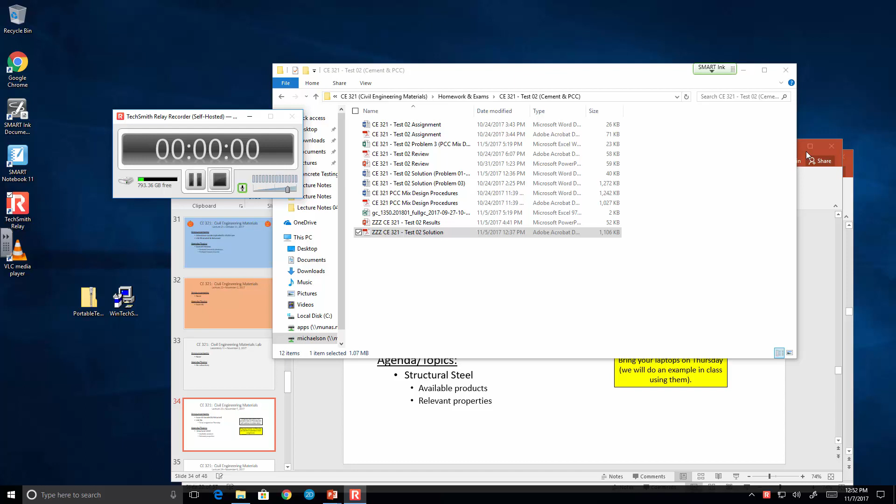Okay. So exam 2, you all have got it. You've got it graded. Like I said, I haven't turned the grades on yet. I will sometime today, near the end of the class or so on and so forth.

I am going to give you all a homework on steel. Okay. If I had to guess, you can probably expect 2 more homework assignments throughout the semester in here. Maybe 3. I'm not sure yet. But I'm definitely going to give you one on steel and alloys, because at the very least you need to process the data that we're going to collect on Thursday. And then I think you should do a couple steel related problems. I think it's really important.

And I'm probably going to give you a homework 7. I'm not sure if I'm going to give you one homework on just wood and asphalt. I might split it up into 2, but I'm going to give you a couple problems on that, and that'll be our homework assignments throughout the semester. That'll be it.

For Thursday, like I said, Thursday might be a little bit of a long day in lab, because we're going to be doing beam breaks, we're going to be doing cylinder breaks, and we're going to be doing alloy testing. So there's no way around that. That might take a little while. We'll talk about that more in detail on Thursday.

One thing I will mention, on Thursday, bring your laptops, okay? We're going to do some data processing in class, and I think it'd be easier if we all do it together. So I will post a sample data file on Blackboard. We will all process it together. Sound good?

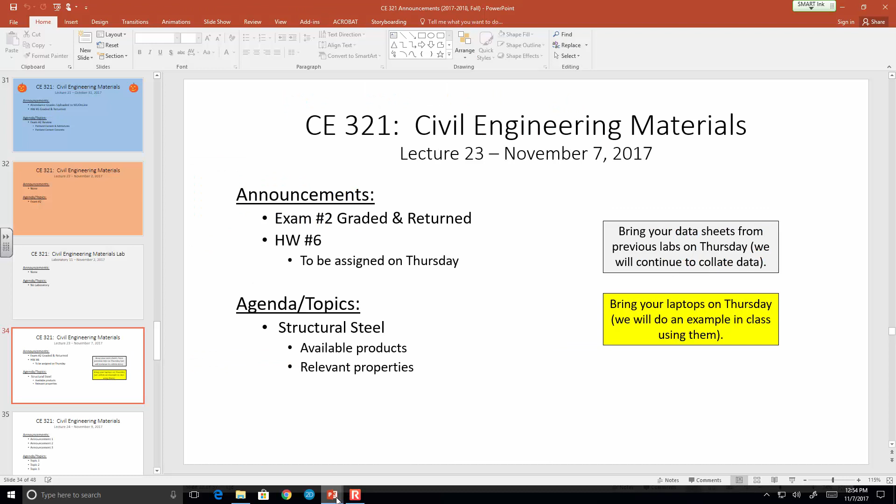Okay, I have that mentioned in the lecture today. It's like example 10, but we'll sort of skip it and leave that for Thursday. I kind of want to do it on Thursday because that's the day we're going to do it in the lab, and I think that makes a little more sense. Okay, we'll see if I have a voice between now and the end of the class.

Okay, all right, so it's been a while since we've talked about steel, so let me sort of recap. One thing I'm not going to cover is the production process. Again, I'm not going to talk about melting raw components or the metallurgy aspect or electric arc furnaces or anything like that. What I want to talk about today are commonly available steel products. There's a few things I want to get out of the way. We've talked about some of this before, but I want to make sure this stuff is clear.

I want to talk about bolts. I want to talk about welding. I want to talk about rebar, because this is stuff that you all need to be aware of as civil engineers. So we talked about hot rolled structural steel products.

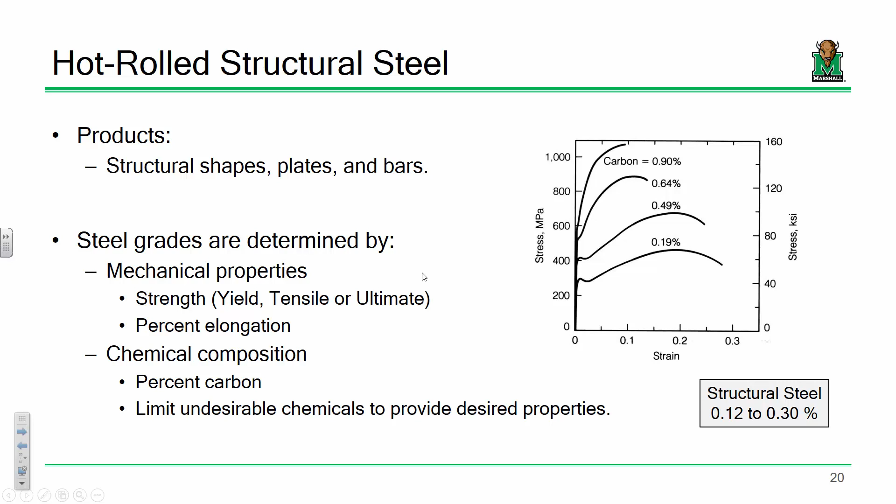One of the things that we said is that for structural steel, generally your carbon content will affect your yield stress, your tensile stress. It will not affect your Young's modulus in the world of structural steel. Regardless of your carbon content, generally your Young's modulus, the slope of the elastic region, is the same. It's not really affected by carbon content, so that's something to be aware of. But your grades of steel are going to be affected by that. We mentioned this last time we talked about steel, different grades of steel like A36, A992, A572 grade 50, and so on and so forth.

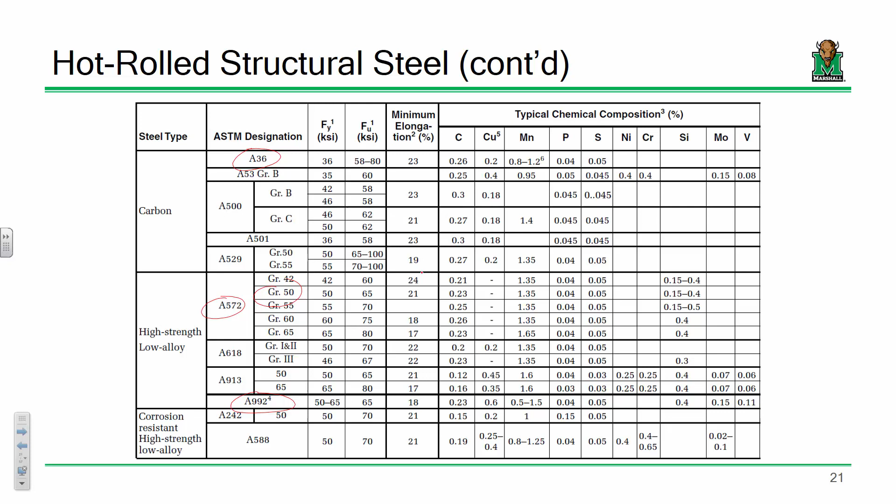I'm going to skip over this relatively quickly just because we've already talked about this, but I just want everybody to be aware that there's oodles and oodles of different steel grades. If you want a rough idea of which ones are the most common, I would say A36, A992, and maybe A572 grade 50. Those are arguably your most common grades of steel. Now, let me also say this. I'm leaving a couple out, like I'm not talking about rebar. Rebar tends to follow its own grade. And some other specialty products like shear studs tend to follow their own grade. Bolts tend to follow their own grade. But general structural steel, those are some pretty common grades that you would use.

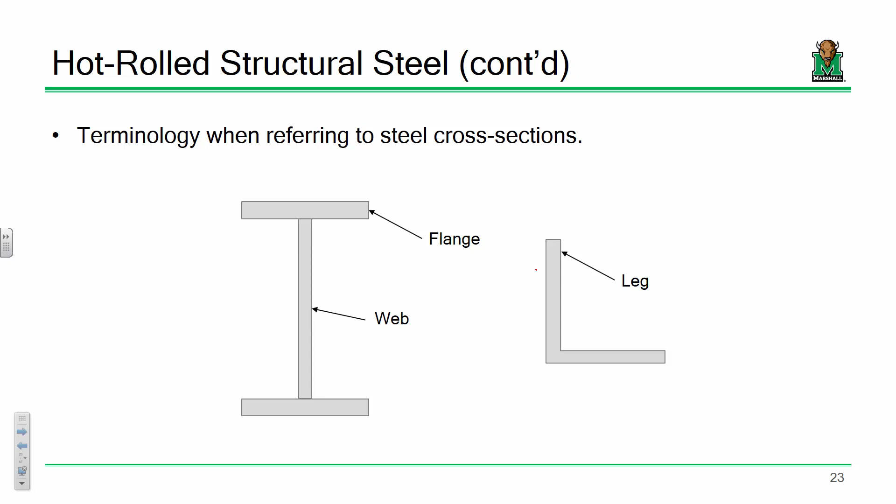We talked about hot rolled shapes like flat bars, W shapes, angles, channels, T's, so on and so forth. Remember your terminology. This is the flange. This is the web. That's the flange too. This is the leg. This is the other leg. So just make sure if you're talking about angles, it's legs of angles; for I-beams, flanges and webs. Just make sure you're aware of that terminology.

Designations. Make sure everybody remembers this. So for a W21 by 93, the W refers to the shape classification. So this is a wide flange shape. It's essentially an I-beam, but we call them wide flanges because the flanges are flatter and a little wider in general. The 21 refers to about how deep it is. The 93 is its longitudinal weight.

A W21 by 93 per foot weighs 93 pounds. So if I have a 10-foot long section, it's 930 pounds. So that's something that you as engineers should just know, okay? So that's just something to keep in mind.

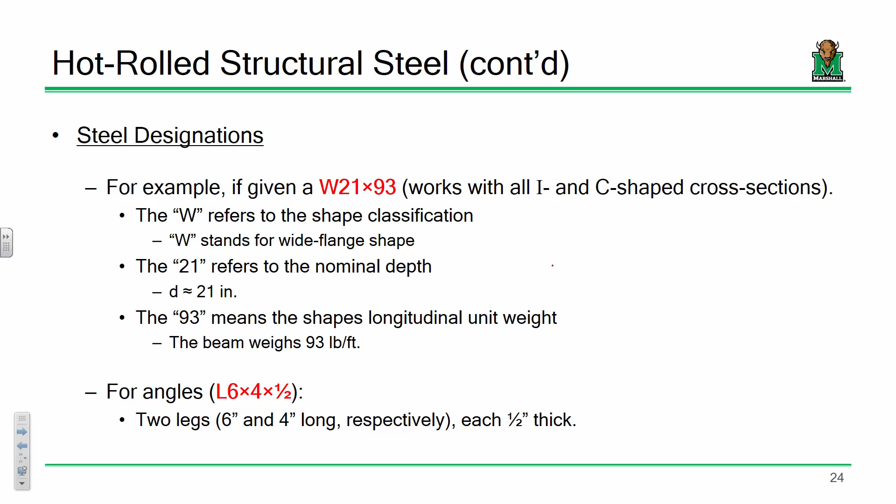Angles. So the designation for angles, if I have an L 6x4 by 1/2, the long leg is 6 inches, the short leg is 4 inches, and each of those legs is 1/2 inch thick. So if I had equal legs, I might say L 6x6 by 1/2, and so on and so forth. Everybody okay with that? Okay.

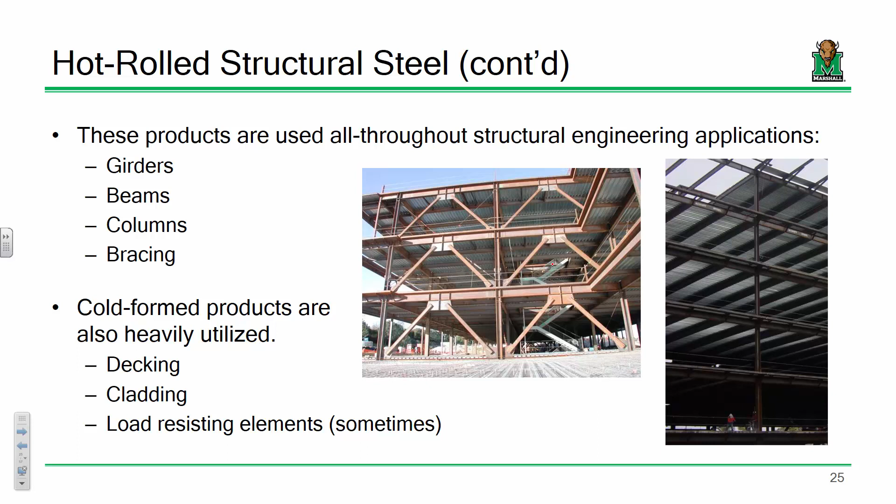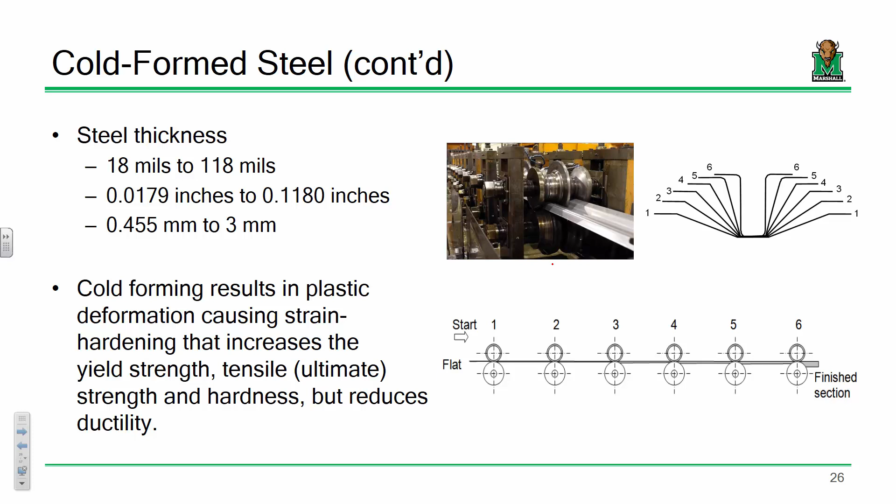So hot rolled products go into beams, columns, braces, girders, you name it. We mentioned cold form products last time that can be used to produce decking or cladding. With cold rolled products, you take a pre-produced flat plate of steel and you successively bend it into a desired cross section. So it starts out flat, and then one roller bends it up a little bit, the next roller a little bit more, and so on. You can get all sorts of different cross-sectional shapes with cold form steel. So that's a pretty commonly available product.

It's very commonly used, for instance, in floor pans and deck pans for buildings. Here's another example. How many of you have been on a West Virginia DOH bridge construction site? Have you seen them use SIP metal deck forms for concrete decks? It's like a metal wavy pan. That's an example of a cold form steel. They also tend to be used for wall studs in buildings, like light metal gauge wall studs. They're really thin, so they can buckle, and because they're thin, if they corrode, it's a lot worse. So you have to take that into account.

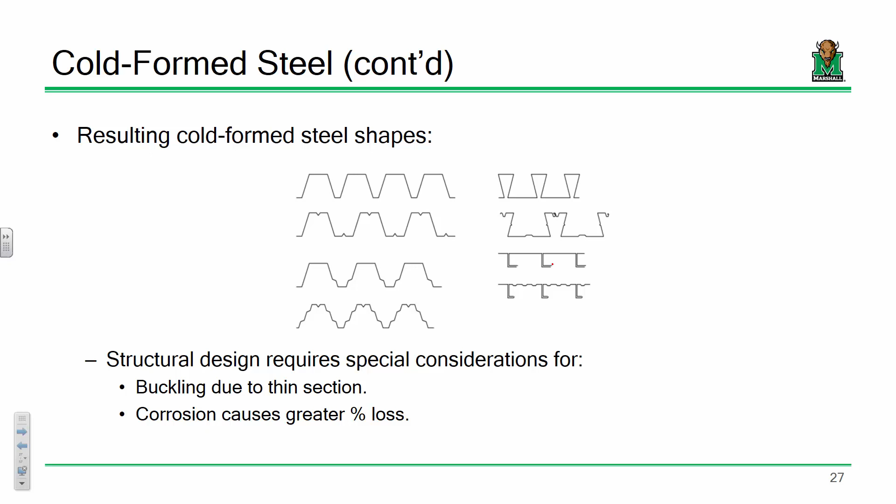Okay, bolts. Did we talk about bolts last time? Okay, I'll go over this very quickly. There are really three main methodologies to join steel together: bolts, welds, and rivets. We don't rivet anymore, okay? You may have to perform load rating on, let's say, a bridge that's been in service for 50, 60 years and has riveted connections, so you may have to do some sort of rating application to understand its capacity. Rivets are highly variable in terms of their behavior, and they're kind of dangerous to put in, so we don't use them anymore, especially since we have high capacity bolts and we can weld with a lot better quality control. We just don't need to rivet.

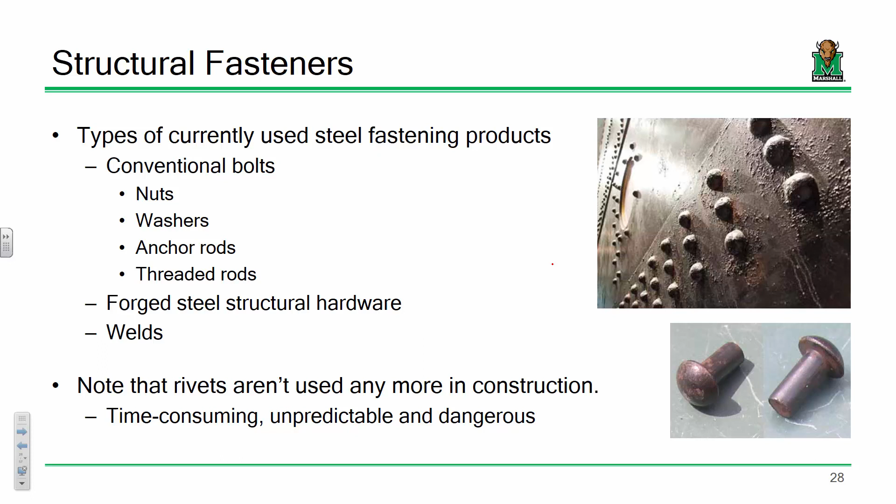So I really don't say much about rivets other than there might be a time in your career where you have to load rate them. And when you do, you basically make an assumption and apply one heck of a factor of safety to it. And that's pretty much what you do. I wish there was a more scientific means. There really isn't. There's been some research to try and quantify it, and it's very variable, so that's really the only way you can handle it.

If you look up ASTM A490, it is a specification for high strength bolts. That's what it is. So those are your grades. A490s are a little bit pricier, but you can use less of them. So it's a question, if you have to design a connection, do I use 10 A325 bolts or do I use 8 A490s? Well, it's a money cost, whichever's cheaper, and whichever's going to be more available. There's never really a good answer to that. Steel is one of those materials where its price does vary a little bit from time to time. It depends. So you just need to be able to assess both.

A307 bolts do exist, but we don't use those very much. Those are used primarily to get an initial connection together. They're used for temporary bolts, for secondary members. They're really not used very much in load carrying capacity. In your careers, you're probably going to see A325s more than anything, just so you're aware.

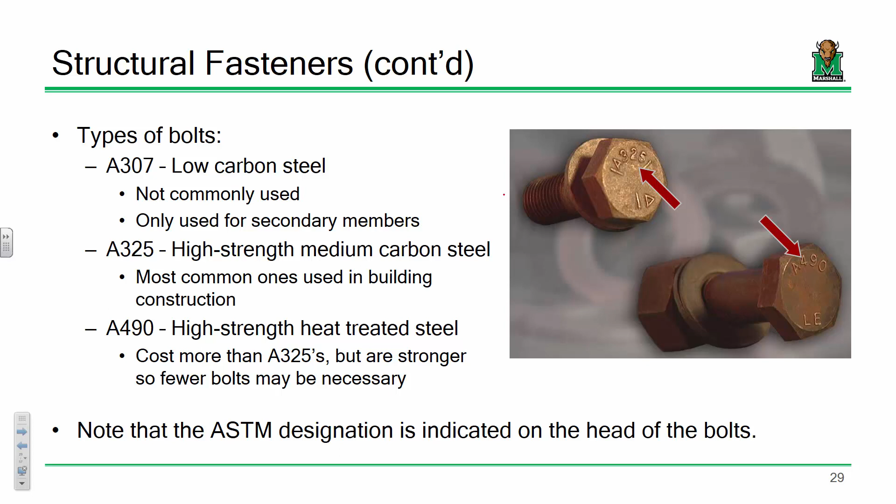Now, I'm not going to get too much into bolted connection design. If you have a chance to take steel design, we'll talk all about that. But I'll give you a few nuggets of wisdom regarding steel connections. So if you're talking about bolted connections, generally when you design the connection, one of two things can happen if you're looking at failure. Either A, the bolt's going to fail, or B, the plate's going to fail. It's pretty much that simple.

So if we're talking about bolts failing, it's pretty straightforward in terms of design. We determine the limiting stress on, let's say, a bolt. So if it's an A325 bolt, we have a limiting shear stress. If it's an A490 bolt, we have a limiting shear stress. So we take that shear stress, multiply it by the area, and account for safety factors, and then we have the capacity of a bolt. So I'll make up a number. Let's say one bolt is going to fail in shear at 10 kips. Let's say my connection is going to have 120 kips on it. How many bolts do I need? If one bolt's 10 kips, the load's 120, how many bolts do I need? 12. It's that simple. Literally lay out 12 bolts.

That's it. Make sure that you lay out your bolted connection according to spacing requirements and edge distance requirements. What do you think is going to happen if I lay out my connection and the bolts are too close together? What's the problem with that? What's that? That's a possibility. I'm thinking more practically. What happens if you got bolts that are too close together? Okay. There you go. You can't get a wrench around it. You have to have the bolts spaced some distance apart so you can actually put the thing together.

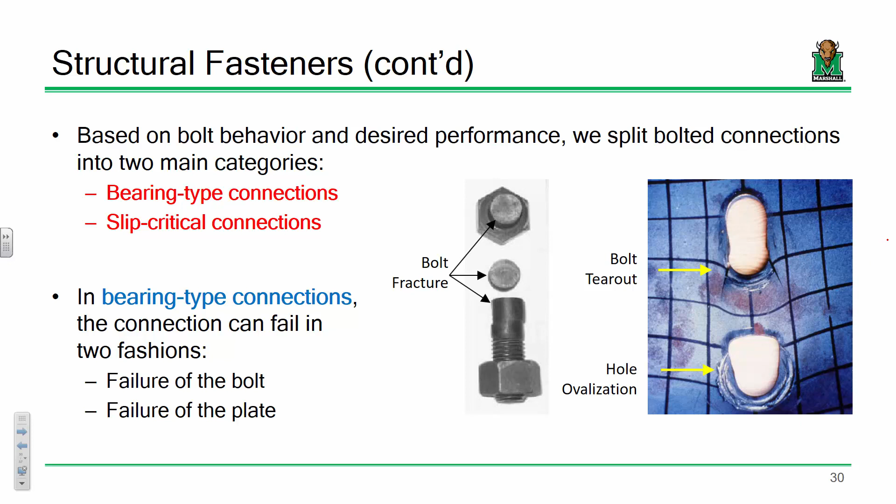And as long as your connection has enough capacity to resist the loads, that's basically it. So that's the long and short of a bearing type connection. Now a slip critical connection is a little different. In a slip critical connection, we have to ensure that neither of those things happen that was in the slide, but we also take into account friction, okay?

So here's a plate, here's a plate. Slap them together, stick a bolt through them. The more you tighten that bolt, what's going to happen to the two plates? They're going to push together, right? I'm going back to physics 211. I got a normal force. I got a coefficient of static friction between plate A and plate B. That means that there is some frictional force developed between the two plates, right? Okay? I can count on that for design purposes.

Now, I can't get as much capacity out of a slip critical bolt as I can a bearing type bolt. So if a bearing type connection only needed 10 bolts, slip critical connections might need like 20 bolts. Okay? But that might be necessary in certain scenarios.

For instance, if I've got a lawnmower and I've got the motor bolted to the frame and it's really loose, I start that lawnmower up and start running it, what's going to happen? Those bolts, this is going to fall off, right? So under any scenario where you're going to have either vibratory loads or high cyclic load, you kind of have to use a slip critical connection. Now, what civil engineering applications do we deal with where we have high cycles of loads? What's that? Bridges, yeah. So generally, connections in highway bridges are slip critical, okay?

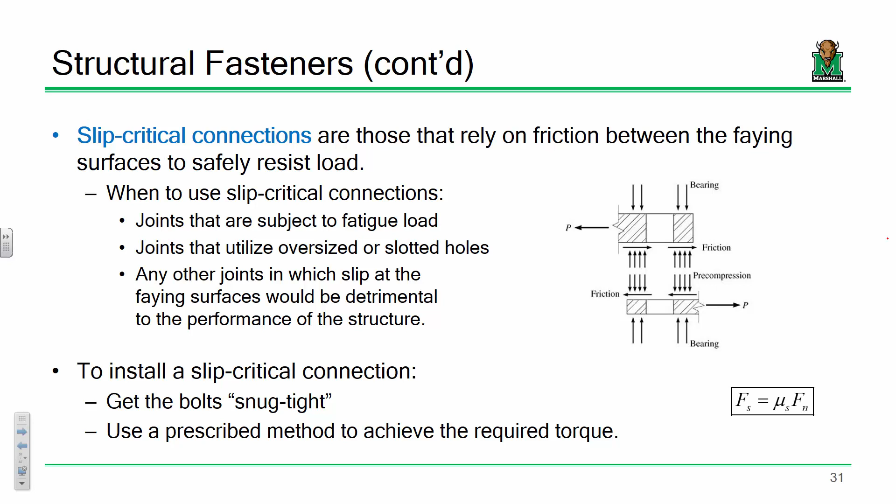Now, to get a slip critical connection, you have to install it a certain way, okay? The first thing you have to do is get the bolt snug tight. Now, what's snug tight? How do you measure that? Well, generally, snug tight is a few hits of an impact wrench or the full effort of an iron worker using an ordinary spud wrench. Literally just getting the plates into contact.

Okay. Once you've gotten it snug tight, you have to use a prescribed method to actually get the prescribed tension in that bolt. We're talking each bolt can be seeing 10, 15,000 pounds in pre-tension. I mean, we're talking about significant tension here. We're not talking about just getting it kind of tight. I mean, these are prescribed tensions in order to generate that required frictional force.

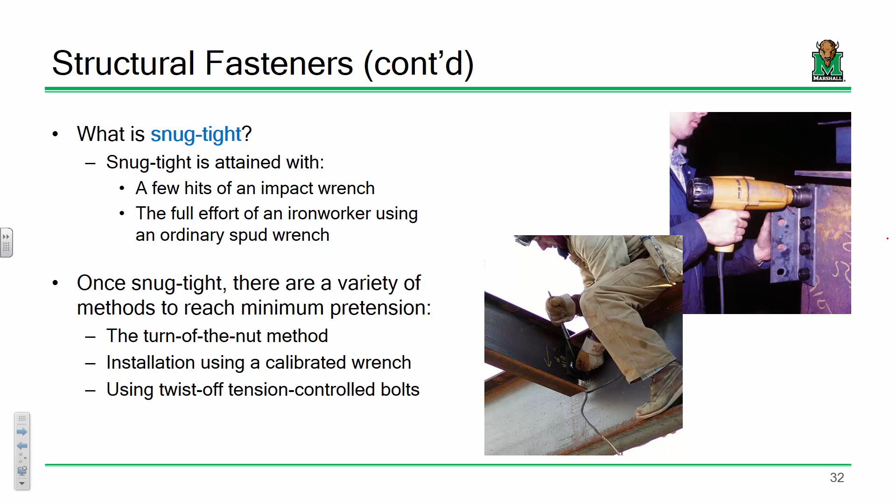So the idea is that depending upon your bolt and depending upon your connection, you'll look it up and you'll see snug tight plus, I don't know, a third of a turn, or snug tight plus a half of a turn. So what you'll do is you'll mark your bolt, mark your plate, and let's say it's a half a turn. So you'll mark this, but then you'll mark your nut half of a turn away. Then you'll apply that tension to where they line up. When it's all said and done, all of your bolts and all of your nuts should line up. And that's an indication that you've got the appropriate amount of pre-tension.

Is it a rough estimate? Yeah, it's a rough estimate. But generally, if you actually measure the required pre-tension in bolts versus what we specify, we usually end up getting a little more. So that tends to be not a big deal. This is one way of achieving a required pre-tension.

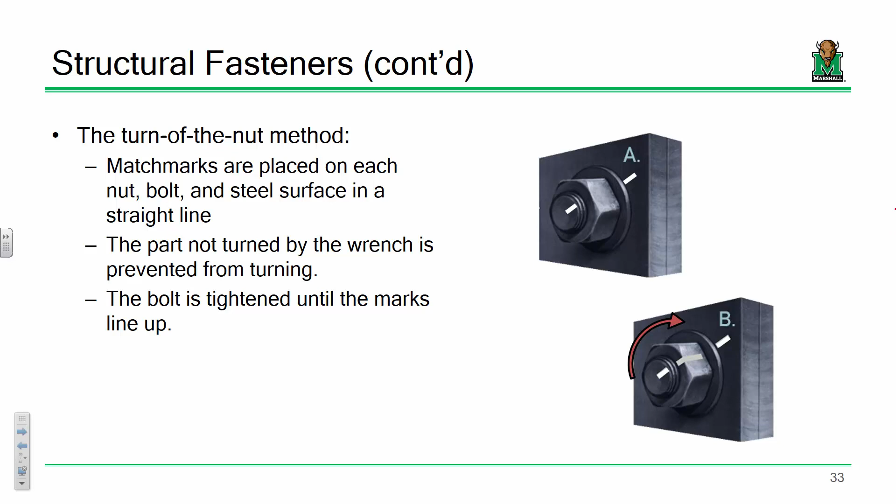Effort. Usually, you'll need a larger bar wrench. There are some high-capacity power tools that you can use and just work in it. Well, let me say this. One method that's become real common nowadays is to use twist-off control bolts. There's a little bit of an initial premium because you have to buy some special hardware, but they're really nifty, okay? And they're really simple to install. These things are pretty cool.

So first off, if you ever see a twist-off control bolt, one of the things you'll notice is that the head is rounded. Okay, which if you've ever put things together, if you've ever done any mechanic work on a car, you're like, well, don't you have to have a hex end on each end so you can put a wrench on one end and a wrench on another end? Like, how do you grip that? Well, you don't. Okay, this is a very specialized wrench, so let me explain how it works.

So you put the bolt through, you've got your washer and your nut, you screw that on. What this specialized wrench does is it actually grips the nut and the bolt at the same time. So if you notice, see how there's this sort of nub on the end of the bolt that's got these little grips on it? Everybody see that? So what the wrench does is it grabs that splined end and it also grabs the nut, and it turns them both at the same time. And then once you reach that required tension, it breaks that end off.

So all you have to do is look at the connection, and if you see a bunch of connections with those ends broken off, you know you've met your required tension. So it's a little easier on an inspection side. A lot of contractors tend to like this because it's quick. You can get it done. So, anybody ever seen this used? You seen it used? It's pretty nifty, isn't it?

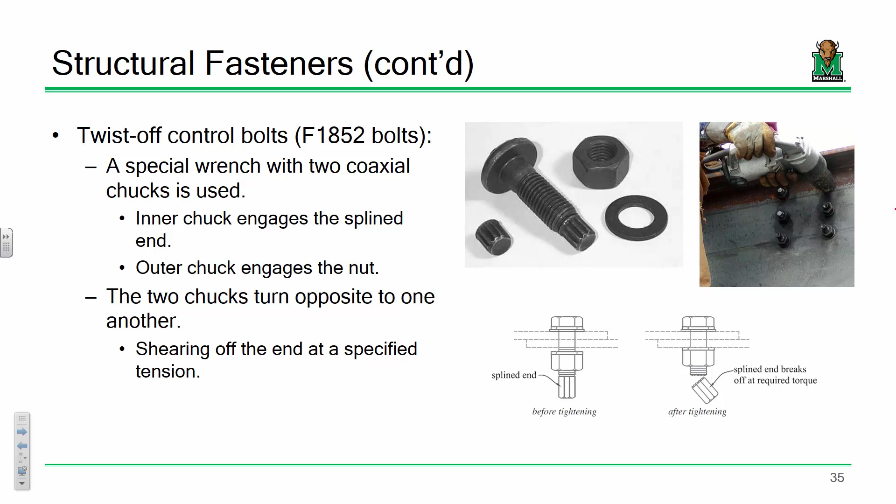What's that? Oh, the one in Charleston? That doesn't surprise me because there's a lot of bolts there, there's a lot of connections there. And I mean, you're talking about serious savings of time. I mean, real time savings. That's the type of stuff that wins bids. You know, if you say, well, I'll use these connections as opposed to standard bolts. Is there a little bit more of a premium? Yeah, but how much labor are you saving over the entire job? That's serious savings. Okay. Any questions?

All right. Now, let me just make sure you all are aware of something. Okay. We could all go out right now, and as long as we had proper safety training and the appropriate tools, everybody in this room could be installing bolted connections right now. Okay? That's bolts. Welds, yeah, that ain't the case. Welding is an art form, and it takes years to acquire that skill.

How many welders do I have in here? I'm just curious. Okay, so we got some folks in here that can weld. Welding is not easy. It's not something that you pick up and within the first 5 minutes you're an expert welder. There's a reason that welders who do welding on nuclear submarines bring the paychecks home that they do, because it's tough. It's not easy, okay? So it's something I want you to recognize. Welding is an art, okay?

Now we can get some serious capacities out of welds as long as they're done appropriately, hence why the required training. I can take piece of metal A and piece of metal B and join them together. That's all I can promise you. I can't promise you an AISC certified weld. My skill is meager at best. So yeah, I can weld, but I'll be the first person to admit I'm not great at it.

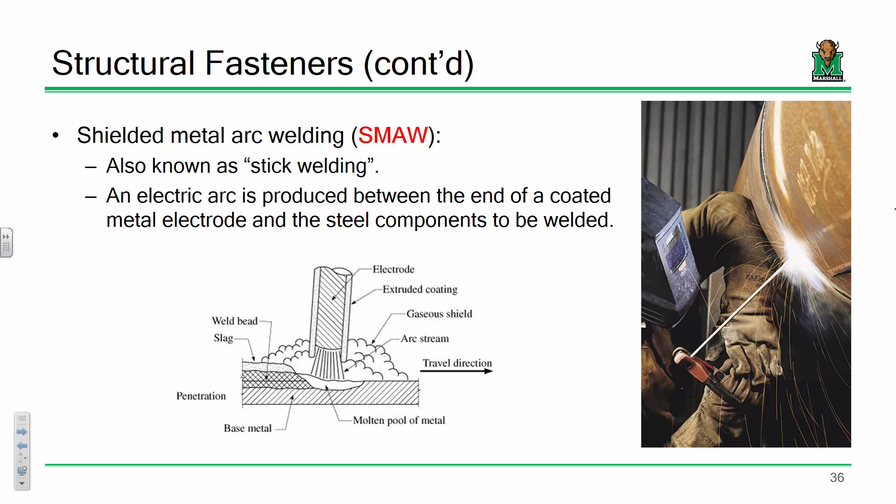So stick welding is one of the most common. I'd say one of the big differences between stick welding and MIG welding, in terms of actually designing a structural joint, is that stick welding tends to be used for more high capacity joints. MIG welding, on the other hand, is for littler things, smaller things in the world of civil engineering.

The difference between the two: with stick welding, you're using a repeated series of consumable electrodes. There's weld sticks that start off about like that. Then you're consuming it as you go, grab another one, and so on and so forth. MIG welding is a little simpler, I think, because first off, you're using a continuous spool of electrode. If you've got a garage back home, you're probably more apt to find a MIG welder than a stick welder. But in large civil engineering applications, stick welding is, I think, a little more common.

One thing you have to be aware of with welding in general is it's not just the metal consumables that you have to control. You also have to control the atmosphere right around the welded joint. You do that one of two ways. You either have a gas shield. If you ever see a large application, you'll see your weld wire, but also a big tank of gas shield that prevents hydrogen embrittlement in your weld, or you use a flux core wire.

If you ever use a flux core wire in your welding, you'll know it right off the bat, because when you finish welding, there's this white soot stuff that gets collected on the welded joint. You kind of have to chip that off. But the idea behind those shields is they're trying to eliminate the ambient hydrogen in the atmosphere. Hydrogen getting into a weld is bad, because it creates embrittlement, which creates a weld that's more susceptible to cracking. So we try and avoid the hydrogen.

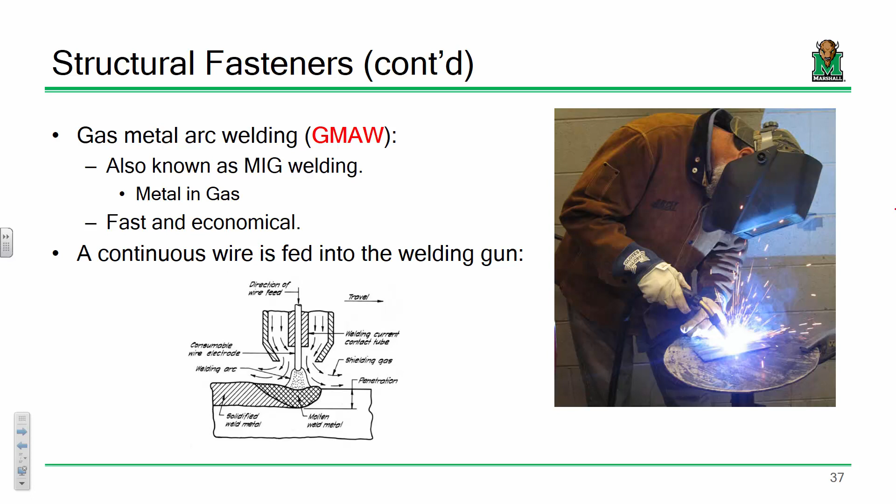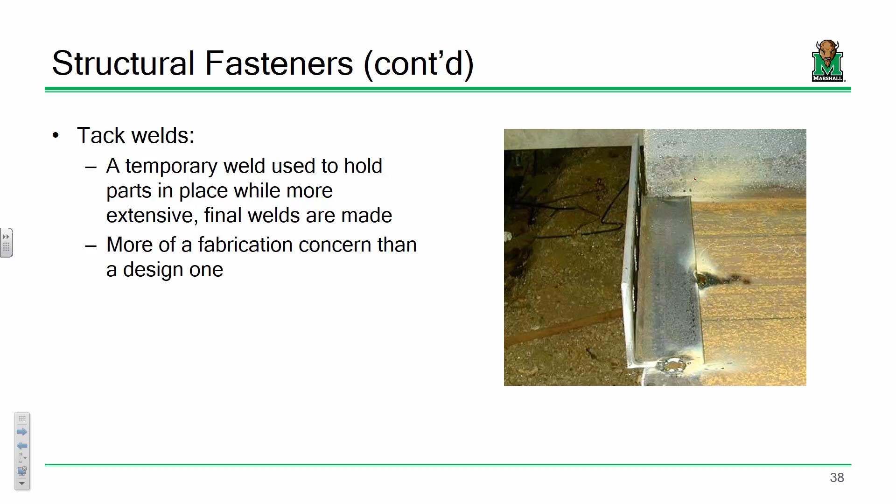The first thing that you do is a tack weld. Just a couple quick hits of your stick or MIG welder just to get that in place. So you weld it, and then you do a whole bunch of measuring to make sure that that piece is where it needs to be. If you're wrong, well, you can grind that off. You do not want to fully weld that entire connection and then find out it's a couple inches off. That would be a bad day. Break out the grinder and start grinding and cut that thing off. That's the only thing you can do. So tack welds are performed on just about every welding application.

The most common structural weld is a fillet weld. So with a fillet weld, we're talking about finished structural welding joints. A fillet weld is the most common. I'd say 85 to 90% of all the welds that we use in civil engineering are fillet welds. So what do I mean by that? I'm talking plate A, plate B, let's say going like this, and filling in that welded joint.

That's a fillet weld. When we compute the capacity, the idea is we have a plate, and we assume our weld looks something like this. So here's our weld. For a capacity check, we take the length of that weld, however long it is along the element, and we multiply that by this distance. That's what we assume to be our worst case scenario from the root to the face. It's the shortest distance that defines the capacity of the weld. For my steel folks, you remember what that distance is called?

It's the effective throat of the weld. You should remember that.

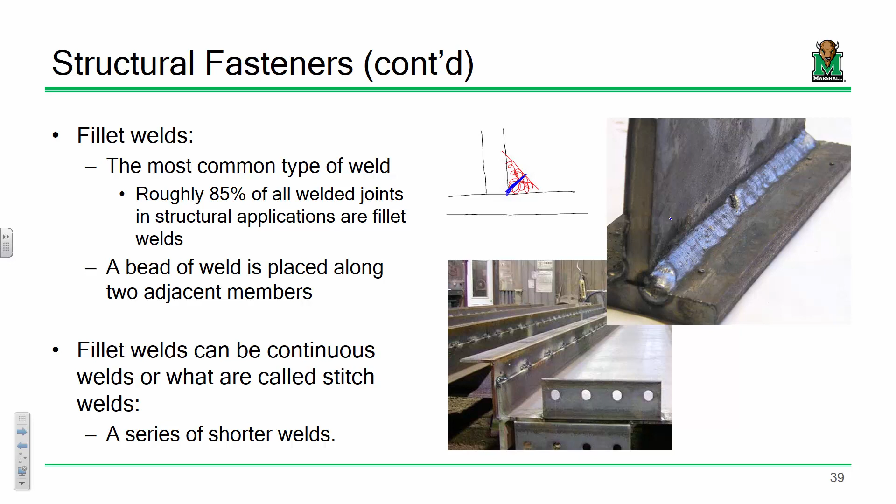I should have said, Dr. Mike has a sore one of these today. I have a sore throat today. Yeah, that's not tweet-worthy, though, so that one wasn't very tweet-worthy.

All right. Fillet welds are the most common. The second most common, I would say, are groove welds. And groove welds are really meant to just completely splice plate A to plate B. There's not really much design from a structural standpoint, because all we do is design this so that the plate will fail before the weld does, and fill the thing with weld metal. In terms of capacity, that's pretty much it.

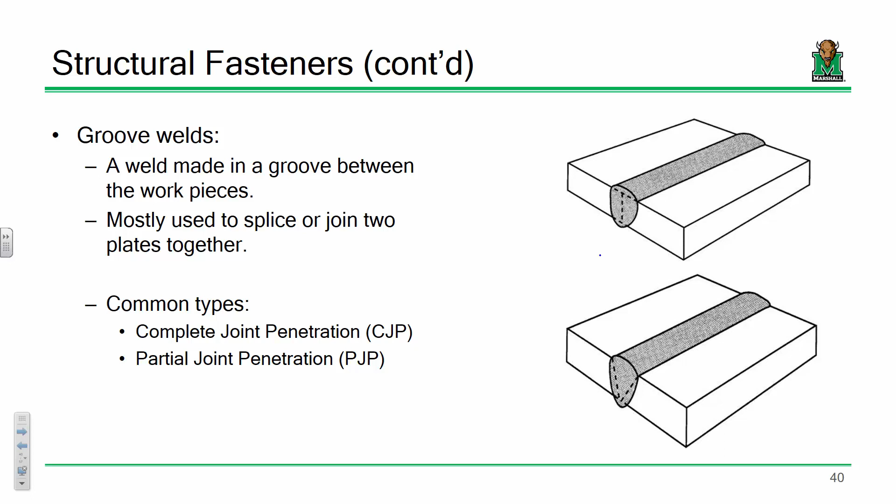So if you take steel design, fillet welds are what we spend the most time designing. Okay. Any questions on connections? We got bolts and welds. Those are the two main ones that we use. Any questions on that? This is good stuff.

Okay. So considering reinforced concrete design is being talked about next semester, let's talk a little bit about rebar. If we're taking wide flanges and angles and channels off the table, rebar is by and large the most common steel product that's used. If we're talking about a superstructure for a building, it's either going to go steel or concrete. If it goes concrete, it's going to have rebar in it. If it goes steel and your floor system's a big concrete slab, guess what? There might be some rebar in it. So rebar is very, very common in civil engineering, and I want you to be aware of the products, what's available, etc.

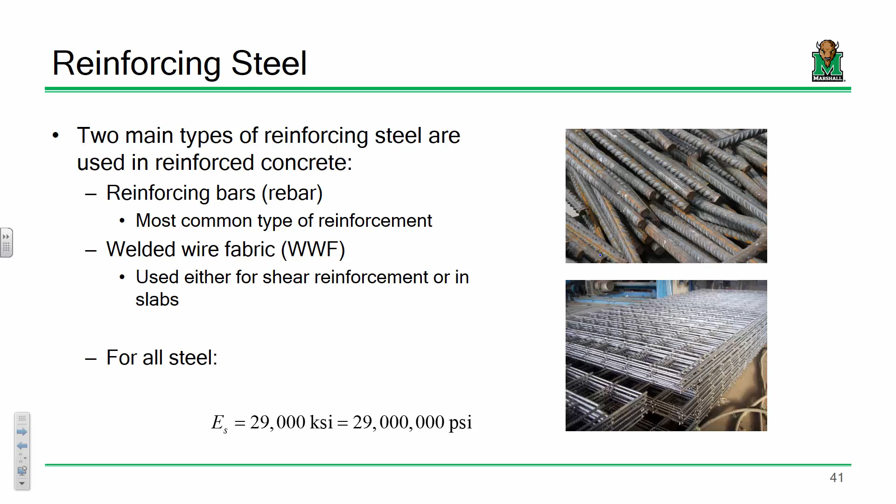So with reinforcing steel, rebar is obviously the most common. We can also use welded wire fabric for some applications. We'll talk about that here in a second. Rebars are generally described by their grades. Grade 60 is the most common, and if I say I'm dealing with grade 60 rebar, I'm talking about its yield stress: 60 KSI, or 60,000 PSI. Y'all remember what yield stress is, right? That's the point when it stops behaving like a rubber band and we start getting permanent deformations, right? So grade 60, more often than not, is the most common.

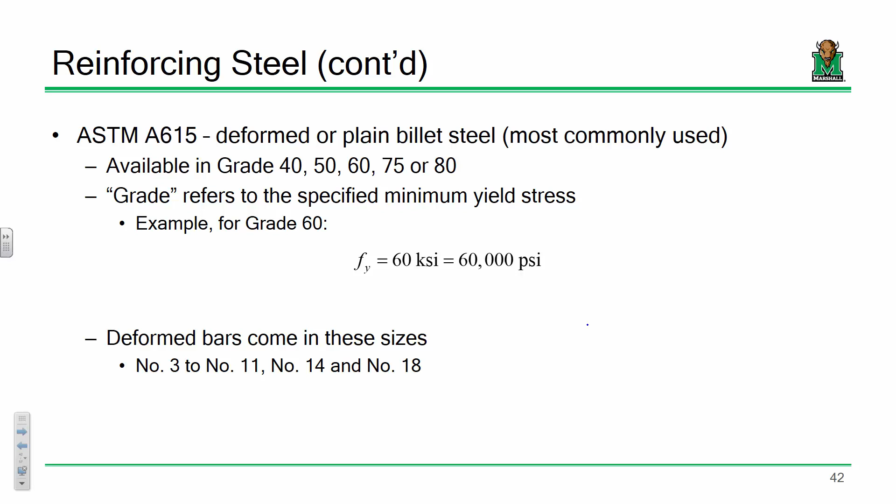Now, rebar sizes. Y'all ever heard the term number 4 rebar, number 5 rebar? Y'all know what that means? Good, because that's what we're going to talk about. I'm going to skip this because you all have this: just additional grades of rebar, but A615 is the most common. Rebar sizes, this is something I want you to remember. If I want you to remember what a W10 by 49 is, I also want you to remember this. So let's talk about rebar sizes.

If I say number 5 rebar, what does that mean? For anything from number 3 to number 8, we're talking about the diameter in eighths of an inch. So the diameter of a number 5 bar is 5/8. Number 7 is 7/8. What's the diameter of a number 4? 4/8, or 1/2. Make sense? Everybody okay with that? So that's number 3 to number 8.

Number 9 is special. A number 9 bar, if I samurai sword or lightsaber through it and look at the area, has an area of exactly 1 square inch. Its diameter is like 1.128 or something like that. The idea is what diameter is required to get exactly 1 square inch. That's what a number 9 is.

Number 9s are very, very common on the FE because you'll have some reinforced concrete problem that says, determine how many number 9s you need to design this beam, and so on and so forth. And you do the math and say, well, I need 4.5 square inches of steel. How many number 9s do you need? You need 4.5 of them, so use 5 bars because the area is 1. Something to keep in mind.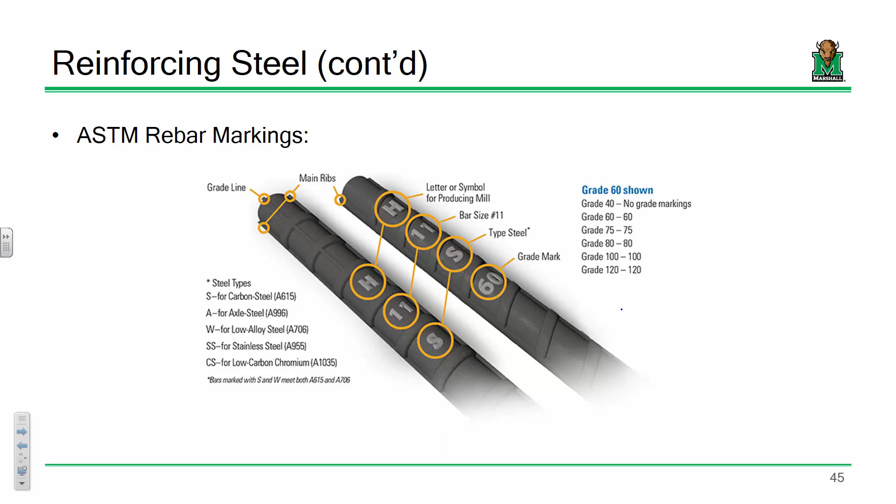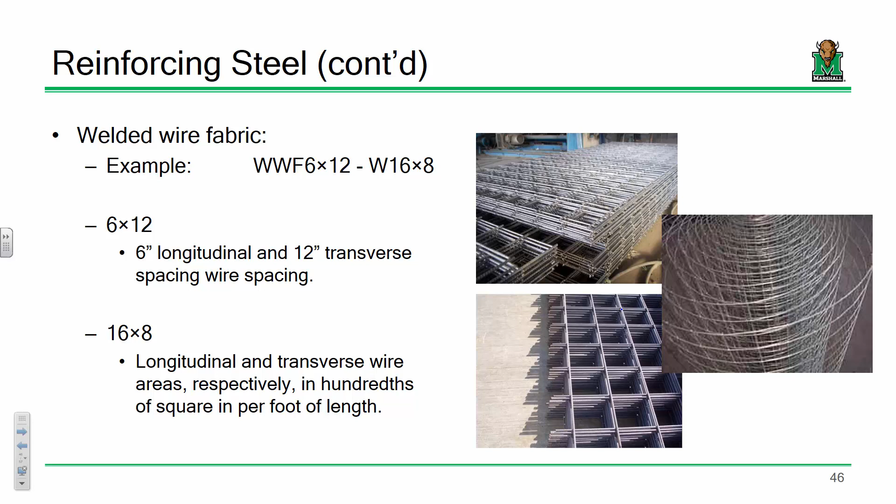Okay. Welded wire fabric. This tends to get used a lot for shear reinforcement in beams. It also tends to get used a lot for floor slabs in buildings, because floor slabs don't really see a lot of load, so you don't need to go overboard and use these big humongous pieces of rebar. You could use a little bit of steel spread out over a long distance and it would do just as good. Another thing with slabs in buildings is that it's not so much structural capacity that we're worried about. We need to place enough steel in the slab just to prevent it from cracking under thermal conditions or under day-to-day use. So that's another condition as well. Just so you're aware of the terminology, in the first 2 numbers, the 6 by 12, the 6 refers to longitudinal and transverse wire spacing, and the 16 by 8 are the areas of those bars in hundredths of square inches per foot. So it's pretty straightforward.

Okay, what else do I have? One other thing that I did want to mention is pre-stressing strands. Pre-stressing strands are a unique animal in and of themselves. If regular old rebar can withstand about 60,000 psi before it yields, this stuff goes to like 270,000 before it yields. This is high grade, expensive steel, but it needs to be because of its purpose. We're trying to slim down large load carrying elements for buildings and bridges. So the idea is we lock a lot of force into that steel, and it'll reduce the amount of force in the concrete so we can slim up the beam. Because of that pre-stressing, it tends to be pretty high capacity stuff.

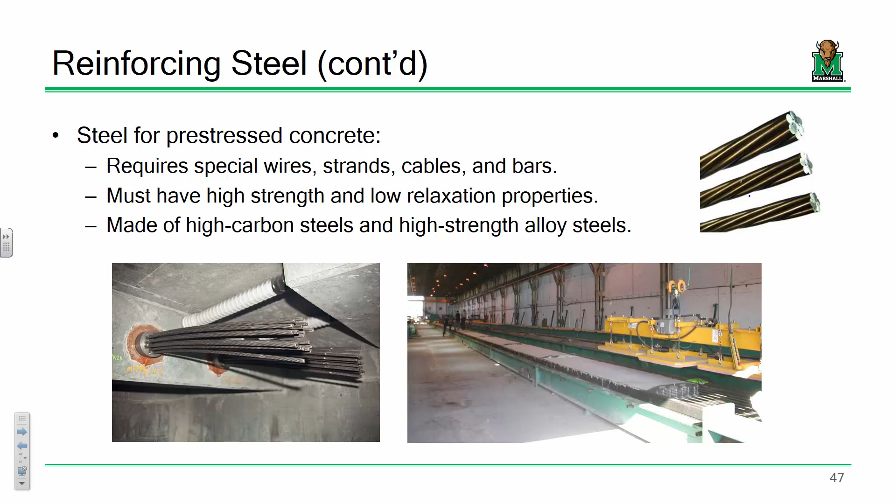Let me see something real quick. We've got testing of structural steel, and then that's it. Okay, I think what I'm going to do is call it. What we're going to do next time is this. I want to give you all a taste of things to come for next time.

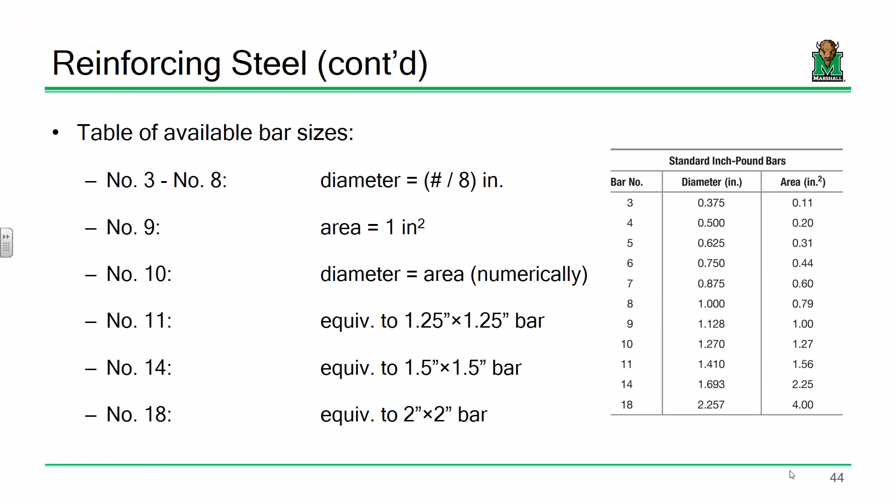One thing I really want you all to be able to do is interpret a stress strain curve. And one of the best ways to interpret a stress strain curve is to make one. What I mean by that is we go down to the lab, we take a piece of steel, we yank on it, we fail it, we take that data, and we compute a stress strain curve. We're also going to do the same thing for brass and aluminum and some other materials. But I want to teach you all next time how to take that data and actually convert it into usable stress strain data. So next time, what do you bring into class? There we go. Excel. I need Excel. That's what we need.

Also, next time, be prepared. Lab may be a little long, so just be aware of that. That's all I got, guys. I will see you all on Thursday.